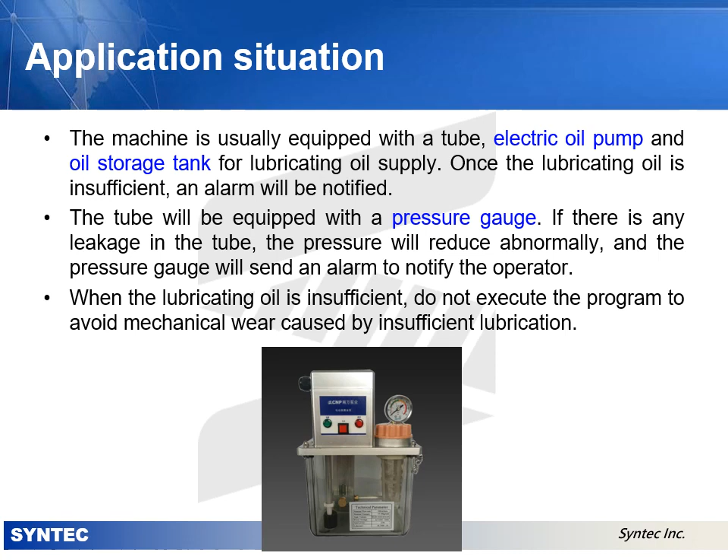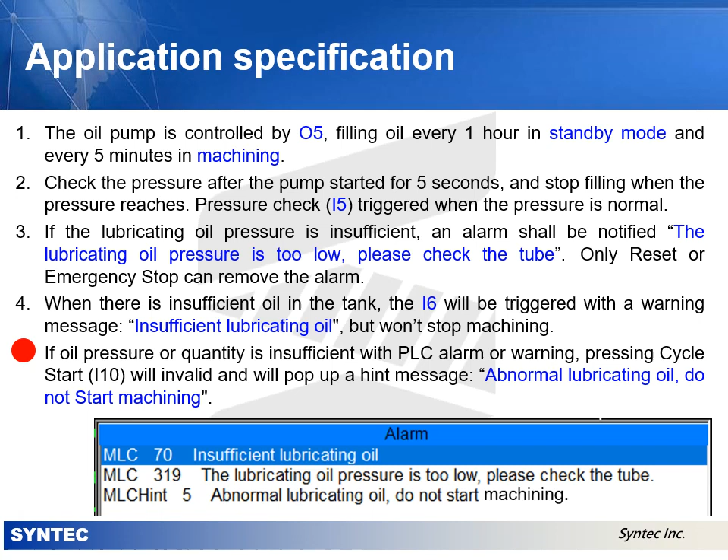Once an alarm or warning appears in the standby state, machining cannot be conducted. If the cycle start button is pressed, a hint message will appear.

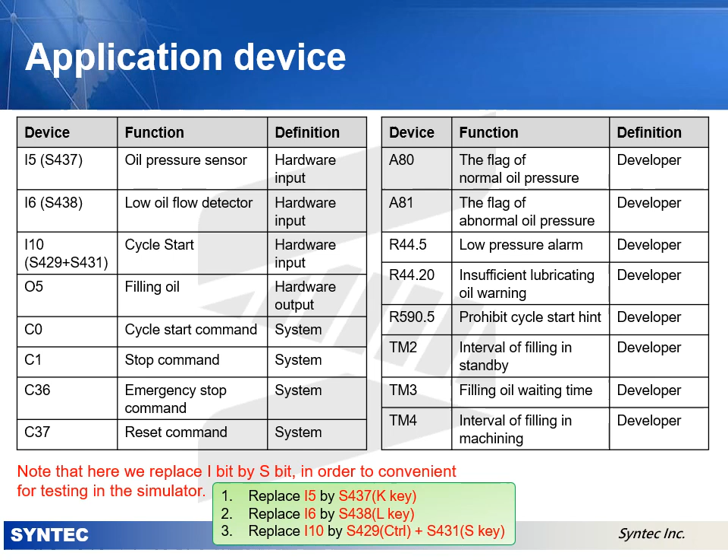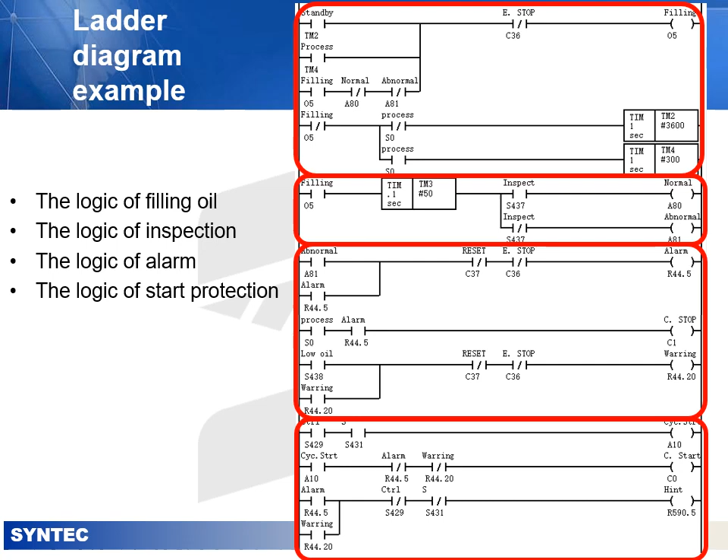Application device. Here is a total device which we used to apply in this example. Note that here we replace I bit by S bit in order to be convenient for testing in the simulator. This example can be divided into 4 logics: filling oil, inspection, alarm, and start protection. The following video will have a detailed introduction.

The logic of filling oil. The pump can be started by output O5 under the 2 conditions, which are standby and machining timer. When O5 is triggered, it will be self-holding until the end of the inspection, or pressing the emergency stop.

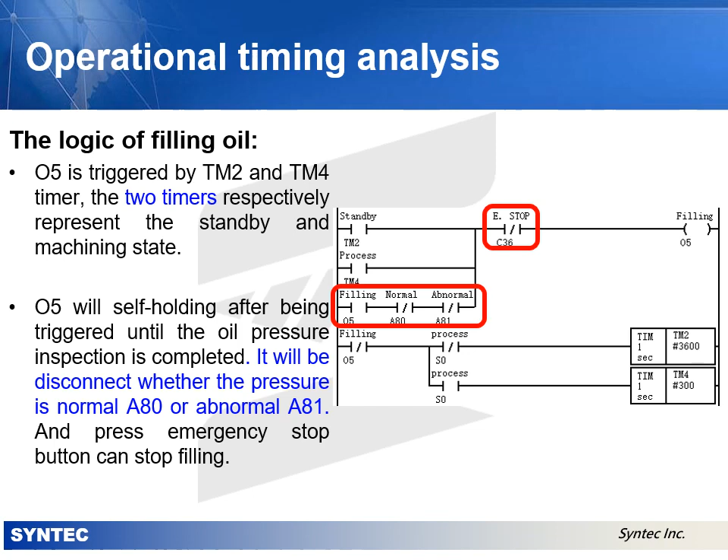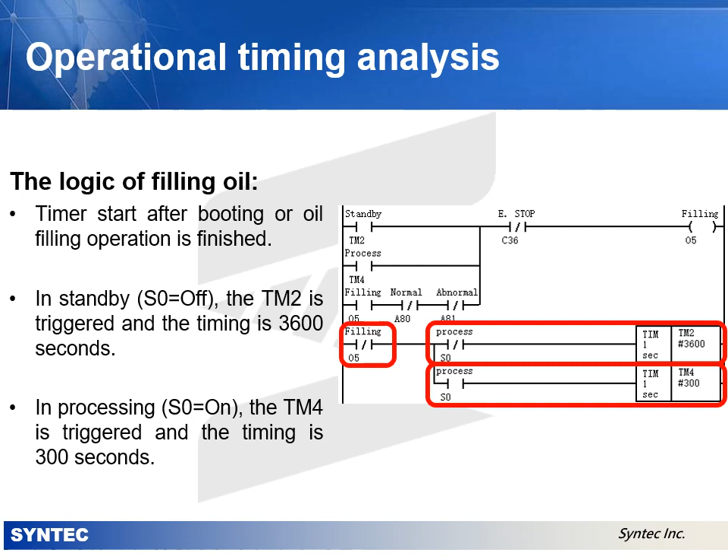2 timers are triggered after the pump stops filling under the condition of whether S0 is triggered or not. Therefore, only one timer will be triggered. The timing time is 3600 seconds and 300 seconds respectively.

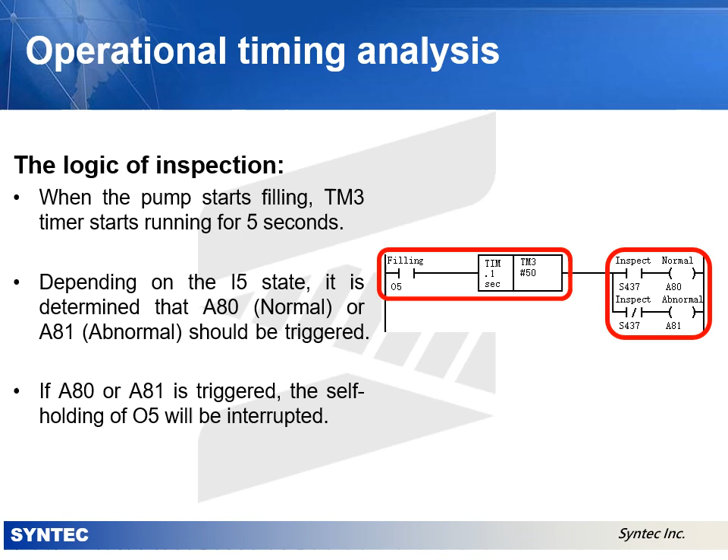The logic of inspection. Once the pump starts filling, the timer will run for 5 seconds before the oil pressure sensor inspection. Normal and abnormal pressure will trigger A80 and A81, respectively. Both outputs interrupt O5 self-holding and stop pump filling.

The logic of alarm. When the oil pressure is abnormal and A81 is triggered, an alarm R44.5 is triggered immediately and uses self-holding to notify the user. If this alarm happens during machining, it will trigger C1 to stop machining to avoid that the lubricating oil

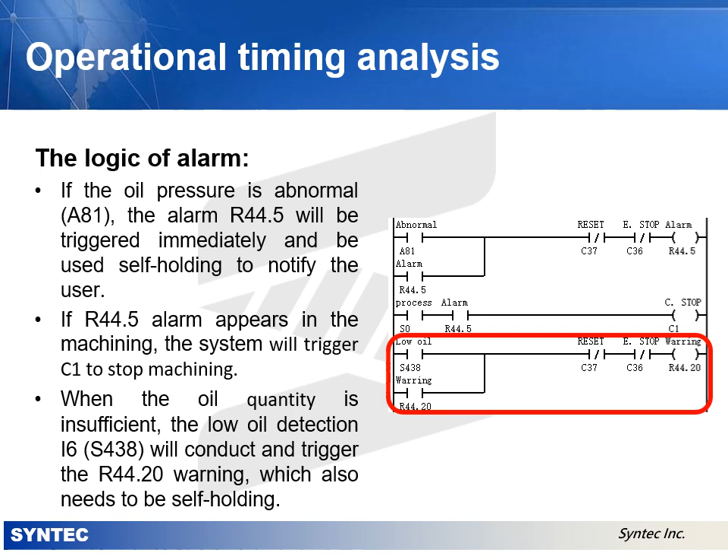is not enough. In addition, once the oil quantity is insufficient, the R44.20 warning notice will be triggered, which is also self-holding.

The logic of start protection. In the standby state, avoid machining under any lubrication problems. As long as R44.5 or R44.20 is triggered, machining cannot be started. Moreover, if the cycle start button is pressed in this case, it will trigger R590.5 to give the hint message.

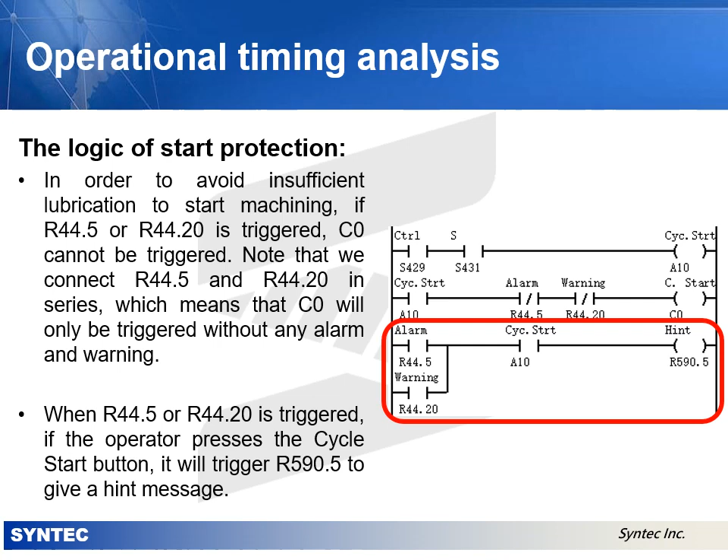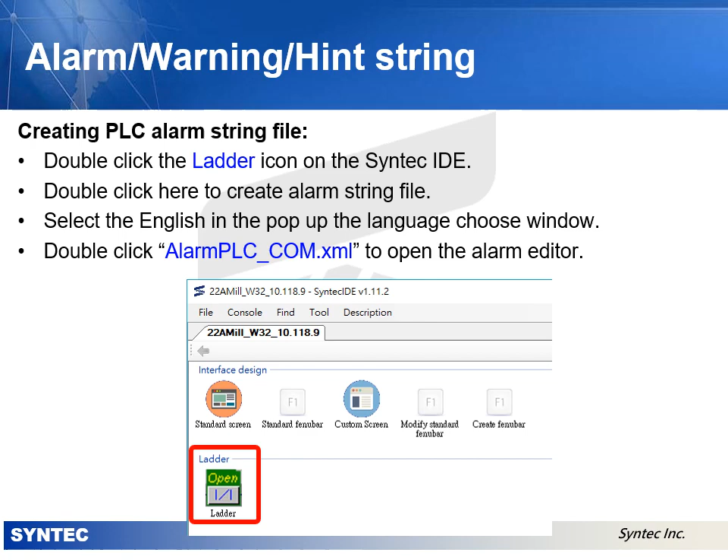PLC alarm, warning and hint string. For the new version of Syntec IDE, you can create the PLC alarm string file in the project directly. First of all, double-click the ladder icon on the Syntec IDE. Secondly, double-click here to create the alarm string file.

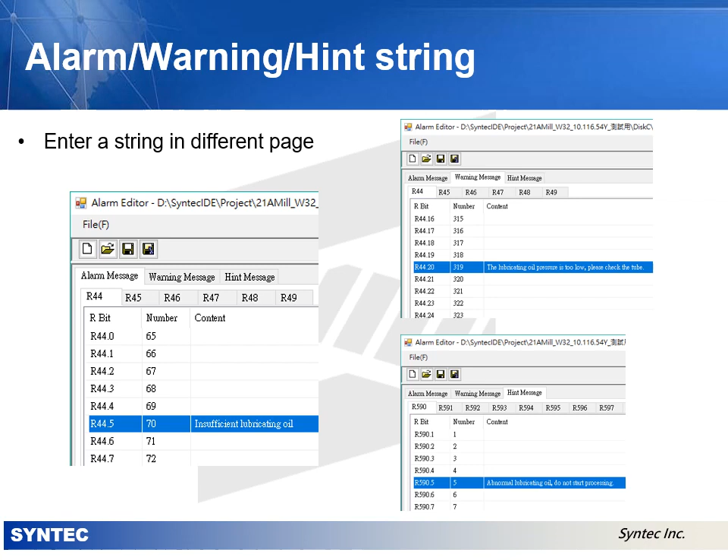Thirdly, select English in the pop-up language choose window. Finally, double-click the PLC alarm string file to open the alarm editor. By selecting different pages in the alarm editor, PLC alarm, warning, and hint strings can be edited separately.

Packaging of PLC alarm string file. After editing and saving, the file is stored under the project. In addition, we can use the Syntec IDE packaging function to install the PLC alarm string file into the controller.

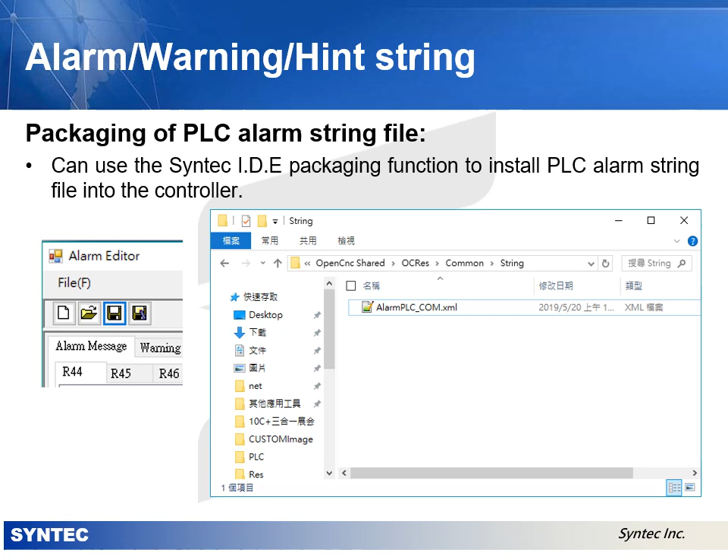When an alarm is triggered on the simulator or controller, an alarm window pops up. Note that only the alarm will remain in the history record.